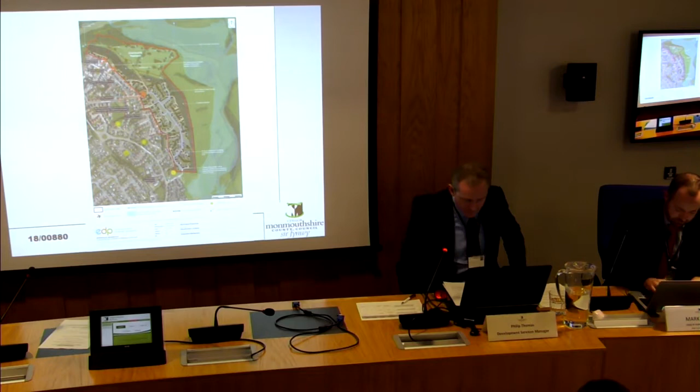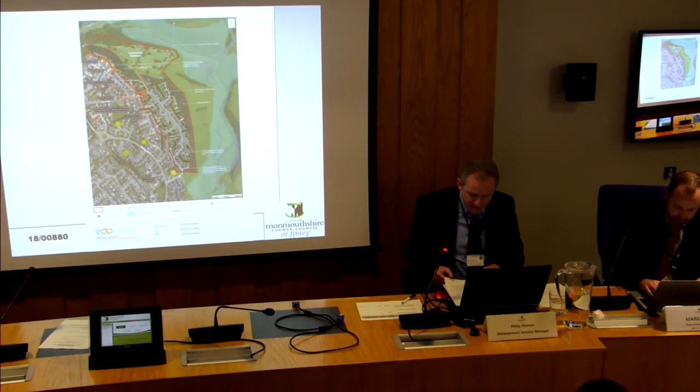4. Unallocated sites are required to deliver 35% affordable housing, and no negotiation will be entertained, although there would be 60% where the development relates to a main village.

5. The development must be acceptable in other planning terms. If infrastructure is inadequate to support new development and it cannot be satisfactorily improved via a planning agreement, permission would normally be refused. This includes matters such as highway capacity, school capacity, primary health care, air quality and the sustainable transport hierarchy as set out in PPW 10.

This applies to all planning applications for residential development, not just unallocated sites. 6. The scale of additional residential development will be considered in the context of the LDP's spatial strategy, both in its own right

and cumulatively with other approved residential development. 7. Development should be restricted to the main towns, Severnside and rural secondary settlements, with the exception of Llanfoist and Raglan, where there should be no additional development on unallocated sites outside of the new LDP, although that is caveated as set out in the report in Raglan's case.

And small, 60% affordable housing sites in those main villages without an allocated site, namely in this case, St Arvans and Llandogo. 8. The size and mix of the proposed dwellings is both suitable for the location and seeks to address our demographic challenges. 9. Any planning permissions will have a reduced lifespan, as set out in the report.

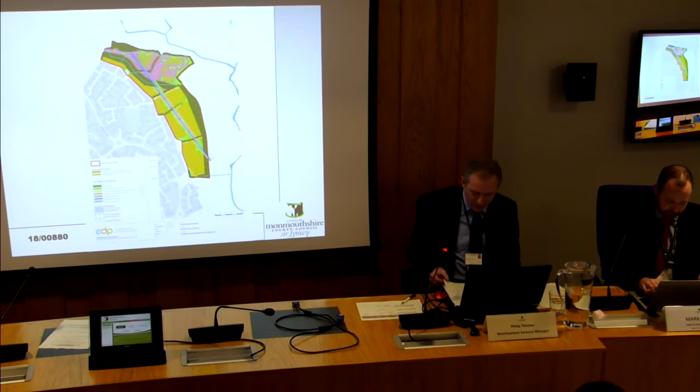This will ensure future occupiers of the site have the opportunity to access local facilities and employment via foot, cycling or public transport, with less reliance on the private car. So we'd recommend approval of the application subject to the Section 106 agreement, which includes affordable housing funding, the education contribution, green infrastructure contributions and green transport funding, as well as the planning conditions set out in the report. Thank you.

Thank you, Phil, for that very detailed presentation. Would the local member now wish to address the Planning Committee? Councillor Watkins, please. Joe, you have 6 minutes.

I'm here to represent the views of my residents who have written to me relating to the proposed development off Church Road in Caldicot. For completeness, I need to say a very small number of residents contacted me in support of the proposal—one in terms of the affordable housing element as they were on the waiting list themselves, and the other stating they hoped increasing the size of Caldicot might help regenerate the town centre. However, the vast majority of residents have opposed the scheme for a myriad of reasons.

I will now list the reasons directly presented to me, but then highlight the ones that I believe as a planning committee you should consider most strongly. There were many concerns about the infrastructure in Caldicot.

The doctor's surgery has long waiting times and it's almost impossible to get an NHS dentist, which leads to higher prices for private dentists. The schools are at capacity. I know Aneurin Bevan Health Board has stated that there are issues with recruitment rather than building space, but that is no consolation to any of my elderly residents who struggle to get an appointment.

Schools are covered by the Section 106 arrangement, but I challenge this council—Caldicot schools are already full. We cannot wait for the houses to be occupied and get the 106 funds before we build the extra school places we require, or we will have a ridiculous situation in which we are busing our children from one town to the next, and it will create an ongoing problem.

Concerns have been raised with me about the archaeological remains found in the Nedden Rise and whether more will actually be discovered on this site. There is also big concern about the increased traffic flow that could impact on air quality, which is a problem throughout our county in some of the more built-up areas, and that might cause damage to the Roman ruins in Caerwent.

Yes, good afternoon, and thank you, Mr. Chairman, for allowing me to speak on behalf of the overwhelming number of Caldicot residents opposed to this application. We are here once more because there was a major error in the supported evidence concerning the availability of affordable housing.

This was an MCC error that was not picked up by either MCC or the speculative developer who knows full well the system and how the numbers for affordable housing are calculated. This error was identified by a member of the public. The evidence that was relied upon to justify your original decision to approve in November has changed significantly.

The last time you voted, you made your decision based on incorrect data that showed a shortfall in housing availability, particularly affordable housing. The shortfall is now significantly less. According to your own targets, it is in fact 38.

We require an answer why these incorrect numbers and developments were able to go unnoticed and have been used to justify a departure from the LDP. How could MCC lose track of the numbers? Why should we now rely on any evidence put forward?

The Church Road development is outside of the LDP, a development brought forward by a speculative developer whose sole motivation is profit. The residents of both Church Road and indeed Raglan, both areas outside of the LDP, have had to act as oversight and throughout this process have identified the errors in data and statements.

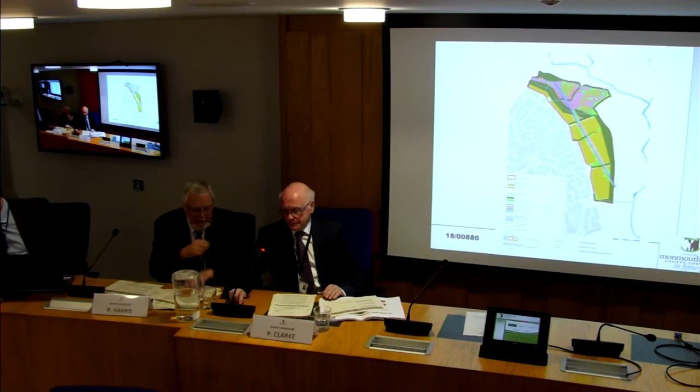Thank you, sir. Roger Heffer, the planning consultant responsible for this planning application.

Members, you've just heard points which I respect, but frankly, all points which have been made many times before over the roughly 10 months since this planning application was submitted. They've all been very thoroughly assessed by your officers, and your officers have concluded that, on balance, the planning application should be recommended for approval.

As you will be aware, this committee resolved to approve in November. In my view, the case now is even stronger than it was then. We now have the new PPW 10, which sets out some very strong guidance on how sites for development should be selected and how they should be planned and developed. This scheme is very much in accordance with that advice, as the officer's report spells out in some detail.

As far as housing numbers are concerned, we know there was an error in certain of the numbers. But the fact is that you still have a serious deficiency in terms of 5-year supply, I think it's still something like 3.5 to 3.6 years. More importantly, the economic and social needs of the county which are impacted by that deficiency are very much unchanged. You still face the prospect of a serious shortfall in delivery by the end of the current local plan period.

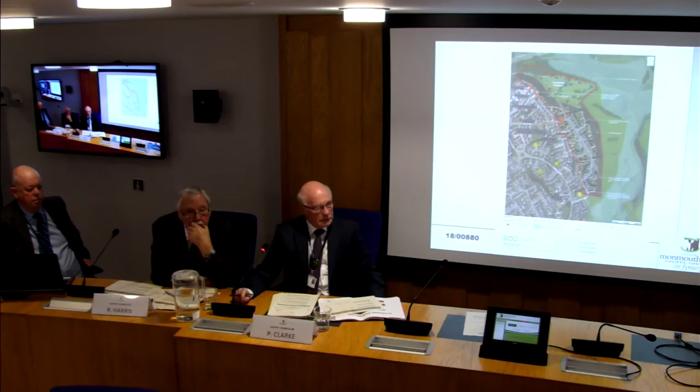Mark Hand now wishes to address us. Thanks, Chair. I've got some correspondence from the Town Council to make members aware of, because they're not here to address you. So two bits of correspondence.

The first one reiterates the points from Councillor Oliver Edwards, who attended the meeting in November. The short version is that the Town Council stance remains unchanged. Caldicot Town Council supports the need for affordable housing, however the Town Council refused the application when it came before them for the following reasons.

The proposed development is outside of the LDP. There's insufficient infrastructure, and a lack of primary school places in the Caldicot area. The doctor's surgery will struggle due to increased patient numbers, not just from this development but from developments in Crick, Sudbrook, Magor and Undy. Church Road is the main road that traverses Caldicot into the town centre, so additional traffic will cause a bottleneck, especially during school opening and closing times, causing a risk to children's safety.

I've also got correspondence from Councillor Rachel Garrick from the Town Council that I've agreed to read out, if you're in agreement, Chair. Councillor Garrick says she's one of the Town Councillors for Caldicot Castle Ward. As we're all aware, the application for the Church Road housing development is due at Planning Committee today. There appears to have been an oversight in that the Town Council did not receive any formal notification that the application's back on the agenda for planning. As a result, the Town Council has missed the opportunity to formally nominate a councillor to address the planning meeting on behalf of the council and residents.

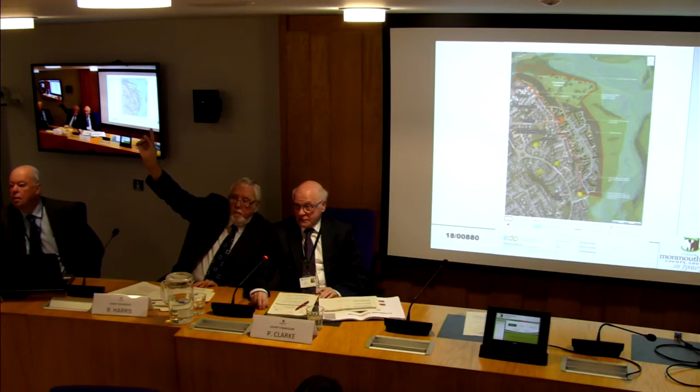Right, we've had the application moved for approval by Councillor Murphy. Is that seconded? Yeah, Councillor Powell. All those in favour of this application, please show. And those against, please show. One. Okay, the application has been approved.

Thank you, one abstention. Can I just make one point please, Mr Hand? The application is adjacent to what I consider one of the best developments we've got in Monmouthshire. It's very, very tidy, well designed, and I trust this present applicant will follow the quality that is already there. This is not a detailed application, just an outline, but I think he should know from our notes that we will look very carefully at the design when it comes forward.

Okay, noted. Thanks Chair. Just for completeness, to confirm what Phil mentioned at the beginning, and to be certain in terms of the process, we'll make Welsh Government aware of this, and they'll have the opportunity to call it in again, because this is a fresh decision today. So we'll go through that process and tell you the outcome. Thanks Chair. Thank you very much. Better go and get Hannah. Yeah.

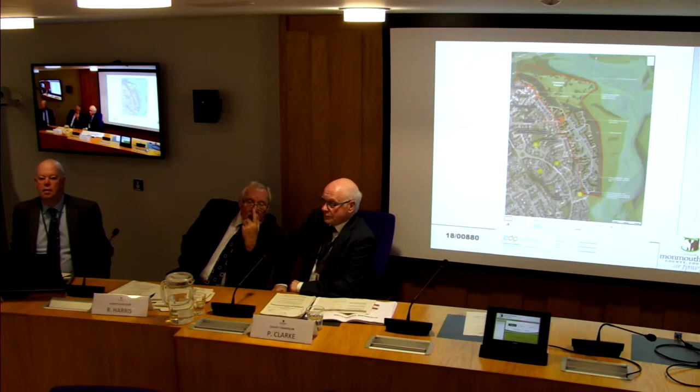Right, we carry on now to the next application, which is on page 57. It's number 00894, at Hatcham Barn, Court William Jones, Monmouth.

Could I take this opportunity to say that the photograph that you were shown... Sorry, sir, you cannot speak at the moment. Your opportunity will come in due course. Please carry on, Mr. O'Connor.

Thank you, Chair. So this is the proposed site plan, which shows the proposed parking to the east of the site, and also the extension, which is accessed via the glass link, which we'll come onto now.

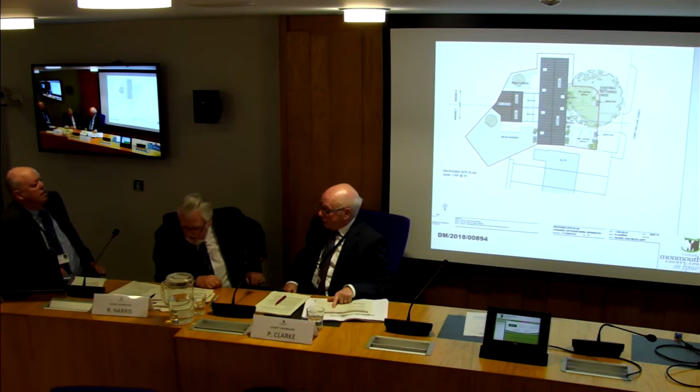This is an internal ground floor plan showing how the building would be subdivided, and it also shows the link for the extension, which is the glass link for the dining room and kitchen area.

This is the elevation detail for the proposal. As you can see, the stone building would be extended vertically with a timber extension, featuring timber louvres and a stone wall to the base of the building, with a metal corrugated roof with roof lights.

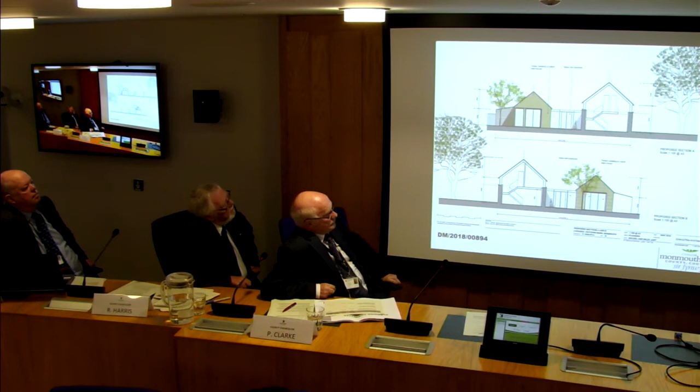This shows the extension proposed to the west of the building. As you can see, there's a glass link and a single-storey timber extension which would accommodate the kitchen area.

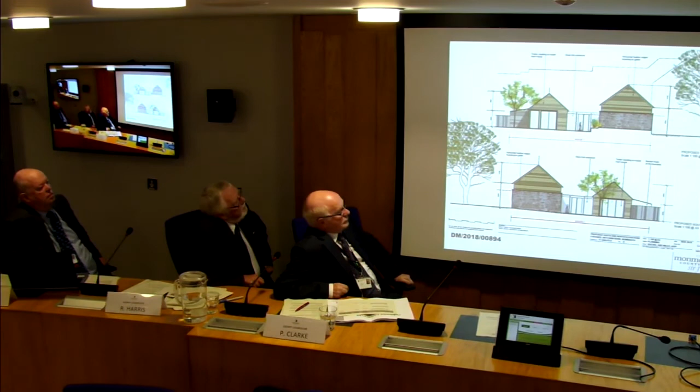This shows the north and south elevations, noting there would be no windows on those elevations at each end. The roof of the building would be extended up to 7.2 metres to the ridge and 4 metres to the eaves.

So in terms of the extension, it measures about 10 metres by 7.9 metres, and it measures about 5.45 metres to the ridge.

The proposed development has been designed with the heritage officer in mind. They've been involved with the planning application, and there's a subsequent concurrent listed building consent application as well. They've been working with the applicants to ensure we get a contemporary modern design on a historic heritage asset, done sympathetically in line with what the heritage officer requires.

In terms of the parking for the site, as I said, if you go back to the site plan, please Philip, there are 2 parking spaces per dwelling. They're 3-bedroom dwellings which are proposed. Monmouthshire's parking guidelines say we should be aiming for 1 parking space per bedroom, so this is slightly not meeting that requirement. However, this is a sustainable location within a central location of Monmouth, and therefore, on balance, planning officers are of the mind that the 2 parking spaces per dwelling in this instance, in this context, is acceptable.

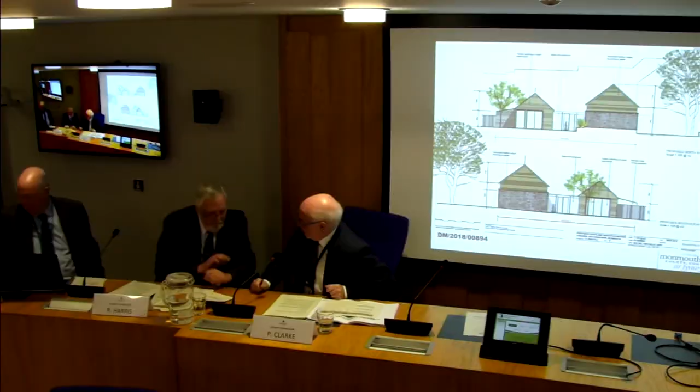Thank you, Mr. Chairman and members of the committee. I'm here to speak as a resident in opposition to this particular application.

You will have read the report, members, and it's been reiterated just now by the officer that pretty well the whole of the report is predicated on comparing the application as it stood prior to some tweaking by the applicant. That comparison doesn't take into account the existing site, nor the existing planning permission. The permission mentioned was part of the overall redevelopment of the Haberdashers' boarding houses, one of which I happen to now occupy, which is St James's House.

The existing planning permission is for a 4-bed barn conversion, but like in every instance, it did have an additional entirely new building at the rear, which was dropped prior to consideration by this committee. What's happened now with the present application is that by raising the roof and increasing the usable floor area on the first floor, and by inserting an additional extension at the rear, you have pretty well returned to the very permission which you didn't consider but would have refused.

On a point of further clarity, if you've got 2 houses or 2 barn conversions being built side by side, what we're saying is you can live in the one that we're going to propose you're going to pay affordable housing on. Therefore, you can remove your obligation for affordable housing, and the one you're not going to pay affordable housing on, you can get away with. There's a technicality there which we're being blindsided by a little bit, I think.

Mr. Connor, I appreciate what you're saying. I think if it was another site which didn't have any previous planning history, the point is that this has got a previous planning consent, so it's exempt from affordable housing because that policy wasn't in place at that time. A 4-bedroom house could be built there now.

Okay, very quickly, thank you very much Joe, I really appreciate that. What I would say is that what was previously approved, people have been accepting of. We're putting more blight into that area. If we're putting more blight into that area, we as a council, we as the community should be looking to get more out of that area.

That's my thinking. What was previously approved is so far removed from what is being proposed today that I can't see, and I don't believe that whilst an element of it has extant planning permission, this scheme doesn't have extant planning permission. A quarter of the ground space might have extant planning permission, or a third, or whatever that element is, but it's so considerably different to what's being presented to us today that I feel very uncomfortable with saying that we're looking at simply eroding the affordable housing contribution from that one unit.

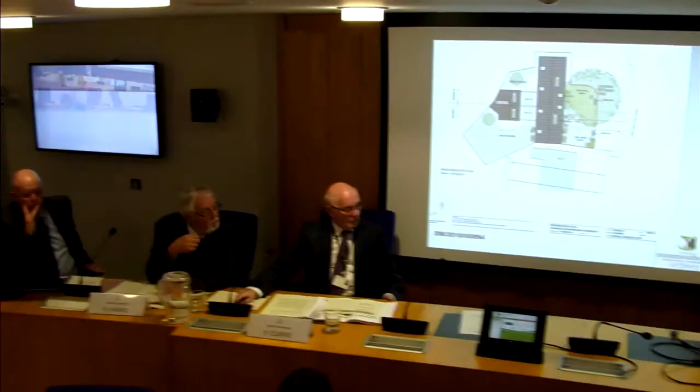Thanks Chair. To my mind, all of the issues are straightforward, apart from the affordable housing question that Councillor Feakins has raised. I think Craig's covered off the points - we're satisfied in terms of impact on neighbour, in terms of amenity, but you've heard what Mr. Rogers got to say and his concerns, and you'll have seen on one of the slides how this property relates to the others. Then parking - straightforward in terms of sustainable location. Planning Policy Wales Edition 10 is very clear on us not having strict parking policies in that kind of circumstance, and there is amenity space for cycles and the like, so that works.

Design-wise, comments have been made about it being subjective, but it's a conversion, oddly in an urban setting in a town. If it weren't for the listing scenario, you could knock it down and build new. It's only because it's a listed curtilage building that it's being converted this way. But we as officers were very happy with the design.

So it's the affordable housing question - that's the dilemma we're trying to think through. There's the one extant consent for a 4-bed conversion. Our policy is clear, and it comes from the CIL regulations, which are clear about self-builds being exempt from that policy. That's where we've taken that from.

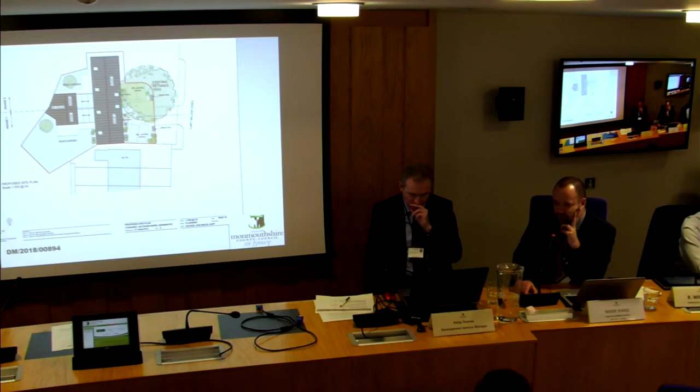I think your concern, Councillor Feakins, is almost doubling up on the freebie on the exemption. So the reality would be - I'm just trying to think this through out loud - we'd be highly unlikely to get 2 contributions anyway, because one would be a self-build. There's 2 units there, so one would be a self-build, so we would only get 1 contribution. I think it's worth us having to think through how that can work.

Would a unilateral undertaking be useful in that situation? In effect, there's a gap in our policy at the moment where they could convert the one and then still claim the self-build allowance on the second, by living in the second but converting the one to free market. To me, that stinks a little bit.

Not stink, but it's just something that's happened by 2 policies marrying together. But if we were to ask for a unilateral undertaking, maybe we would secure that position in advance, if that was possible. Or defer it and leave it to you.

Yeah, Chair, sorry, we're just discussing if there's a way in which we could merge the extant consent and self-build provision, so there is still that 1 contribution. I'm not sure how we'd arrange that in terms of a legal agreement, but I expect there is a way.

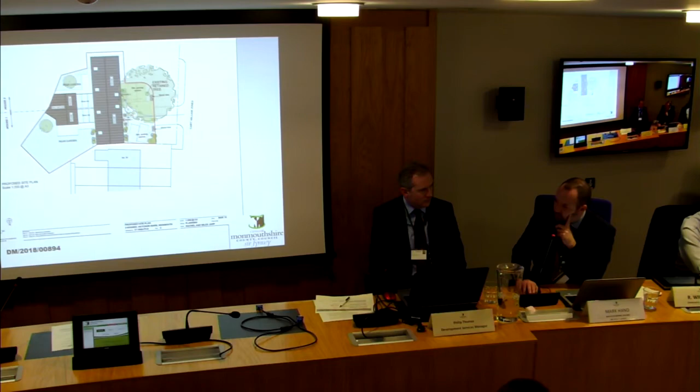So it's been moved and seconded by Matt, and seconded by Councillor Webb. Sorry, Phil. Just a point, Chair. In view of the fact that everybody seems to be happy but everything else - I put happy in inverted commas because...

If that is the only outstanding point, it could be referred to the delegated panel to decide after. It's only a thought. I thought it's quite a strong point coming here, and I think maybe the 3 of us, it leaves us a bit susceptible to criticism.

I think I prefer on this instance, Phil, to see it come back here, because I'm interested in the outcome. So it's been moved and seconded that we defer it for a month, well, until this matter of the contribution is resolved. Is that what you want to do? All those in favour, please show. Right, okay, there we are. Nobody against? No.

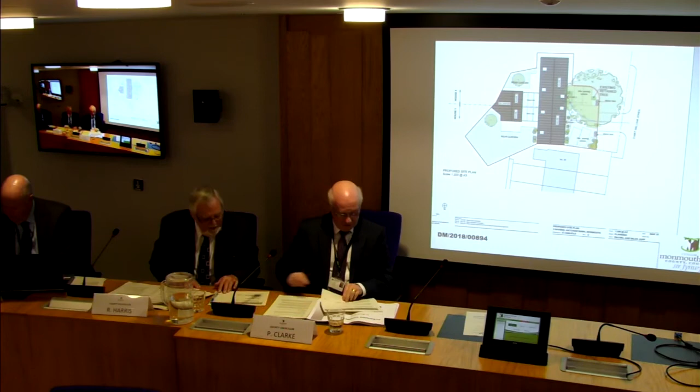Right, it's taken us an hour and 40 minutes to do 3 applications, so I think we ought to speed up. The next one on the list is - so we go on to page 89 now. Oh, I see.

No, you're quite right. Page 73, application 1339 of Penny Park, Lantilio. Yep, thank you, Chair. So this is a full application that relates to a parcel of land on the edge of Llantilio Crossenny that is accessed directly off the B4233. It's worth noting that the application is presented to Planning Committee today as the agent is a close family relative of a member of the development management team. Before going into the details of the application, I think it's worth familiarising members with the background and history to the site.

Planning permission DC2014-00161 was granted in 2014 for the conversion of a redundant building to provide holiday let accommodation. The application at the time was supported by a structural survey undertaken in November 2013 that concluded the property was suitable for conversion. Works then commenced in December 2016. However, the building had deteriorated since the original survey, and further to inclement weather in January 2017, the applicant sought advice from a health and safety specialist.

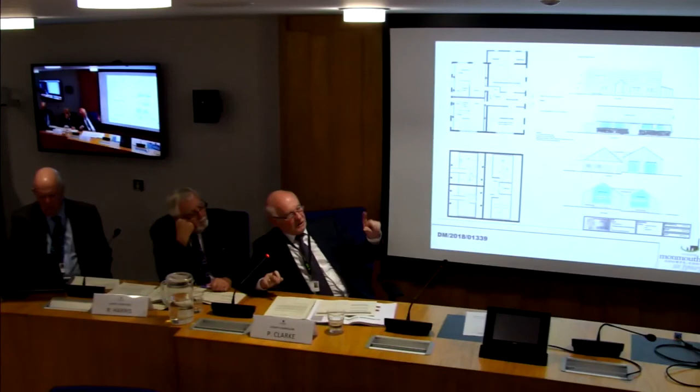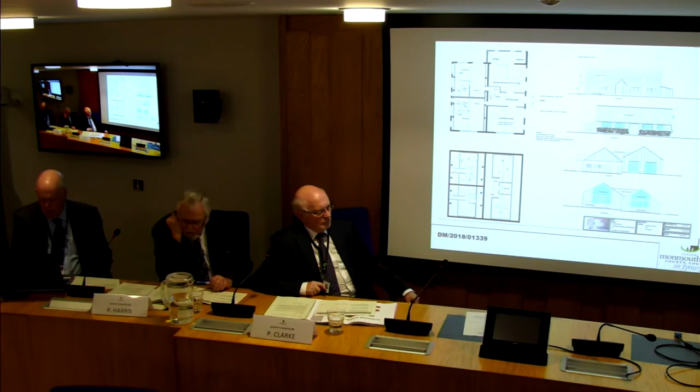The building wasn't demolished. Its demise was an act of God. The applicant took every measure he could to try and save that building. The applicant's intention has always been and remains to implement the consent that was granted. In terms of the flood issues, I think I've covered those sufficiently. So members, you're urged to approve this on the basis of considering the application against those material considerations, which I believe you can apply to this current planning application. Thank you, Chair, thank you very much.

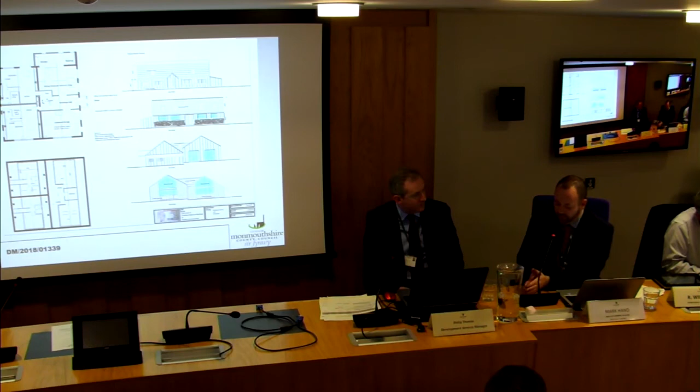Yeah, I think this case is more straightforward than a normal clarification about when it's building a building, because this isn't conversion. There is nothing to convert. It's just a slab of concrete. So there's nothing to paint or nail together.

Okay. Councillor Murphy? Yes, Chair, I wanted to pick up on the foundations as well. I mean, Councillor Higginson was trying to rescue the situation, I think, by saying that if we could raise it up, we could possibly get it out of the flood zone. The applicant's clearly looking to build on the existing footings, which are quite substantial.

There would be quite a lot of expense to add to his woes, and I have great sympathy with the financial situation, but I don't see how that relates to a planning decision at all, I'm afraid. But there would be considerable expense to raise it above that C2 limit, and I've got grave doubts as to whether an inspectorate would approve it even then.

So to pick up on Mark Hand's comment, with a heavy heart, because I've got a great deal of sympathy for him, I shall be supporting the refusal.

Thank you, Chair. I think in common with most of the members here, I'm very sympathetic to the situation that the applicant finds themselves in. But at the end of the day, as a planning committee, we must abide by planning law and take the advice, I think, of the officers concerned. What we don't want is this application being approved by us and then going somewhere and being told that we've made the wrong decision when it's clear that the policy says this is now a new development. And whilst I sympathise very much with the applicant, as far as I'm concerned, I support what the officers are saying, and that we should not approve this application. Thank you.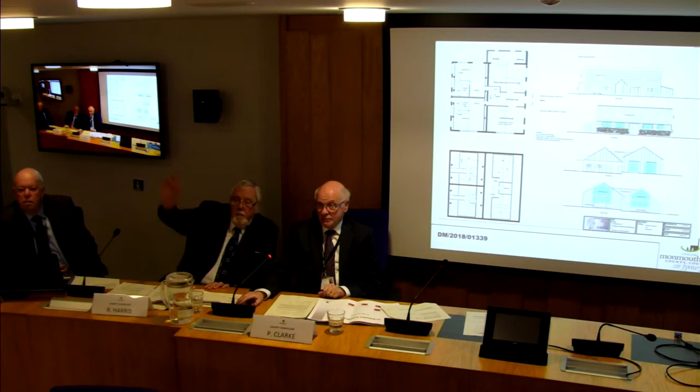Thank you, Rod. Right. Would somebody like to? Councillor Higginson. Yeah, I propose that we accept it, and there are circumstances in which the site could be used for housing development or development of residential property, and I'm maintaining my proposal. Okay, and is that seconded? Yes. Right, those people who would like to approve it, please show. 3, 4. And those against, please show. 5. Therefore, and I'm abstaining, so therefore I'm afraid it is lost. Whoops, with a very heavy heart.

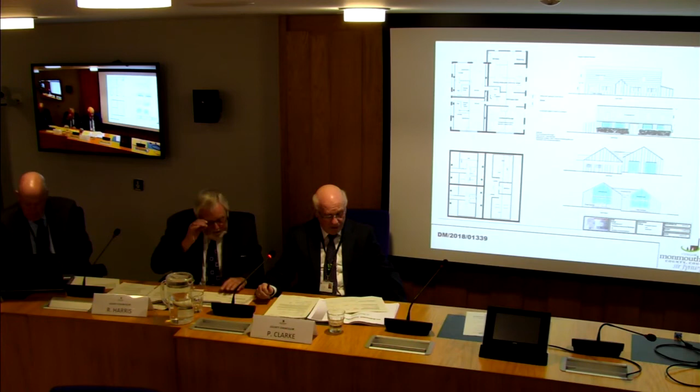Right, the next application has been withdrawn, so we go on to page 109 now, and that's for the barn conversion into holiday accommodation at Penterry, St Arvans. Okay. Mr O'Connor. Thank you, Chair. Yes, this application is at Penterry Farm, Chapel Hill Road in St Arvans, and it's for the conversion of a barn to holiday accommodation.

So on the screen here, members would have seen yesterday, this is the barn in question. It's a modern agricultural building, breeze block, steel framed, some timber cladding. If you go back to the previous photo, please, Phil. That road on the side there is actually a public right-of-way, so members need to take note of that, as you did yesterday on site. I'd like to go through the photos. Keep going, please, Phil. It's a standard agricultural building which you'd find across Monmouthshire.

This is the siting of the agricultural buildings, which is adjacent to 2 residential properties, the barn to the north and a bungalow to the south. In this location, it is those group of buildings to the north.

Yeah. This is again a block plan of the site.

This is the proposed site plan, so this shows the access points on either side of the proposed holiday accommodation and the parking provision for 2 spaces per unit.

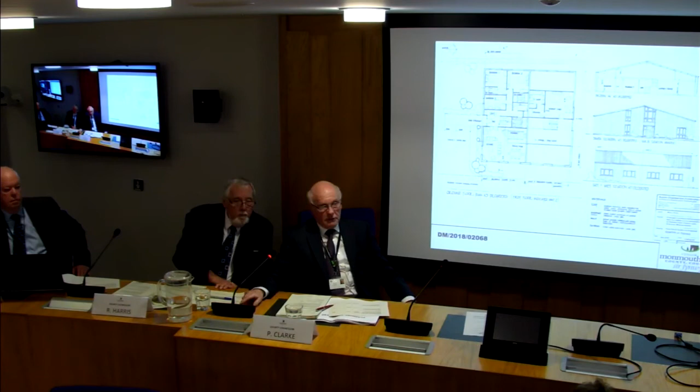Thank you, Chair, for the opportunity to address the committee today. I'm David Glasson, representing Mr. and Mrs. Parry. Penterry Farm is no different to any other farm. It's been compelled to explore farm diversification simply in order to survive in the current economic climate. With increasing energy costs, lower food prices, and all the uncertainty of the UK's departure from the European Union, the additional revenue from holiday letting will support not only the core farm business, but it will have positive spin-offs for the surrounding rural economy as well.

The farm is well placed, sitting as it does above Tintern Abbey, and likewise the Wye Valley and Forest of Dean. Tourism, as we know, is actively encouraged in Monmouthshire, and additional accommodation will unquestionably strengthen the area's appeal as a visitor destination. The barn in question is sandwiched between two dwellings and has not been used for agriculture for 10 years, due to the impact farming activities would have upon the amenities of these dwellings.

It is described as of modern construction, but it actually dates back to the 1970s. It might not be attractive to look at, but it's in sound structural condition, so it's not going to disappear any day soon. Like any other barn conversion, the roof needs replacing, the walls need recladding, but this does not, I stress, does not amount to rebuilding or even new build, and it's really no different were the barn being upgraded to, say, a grain store.

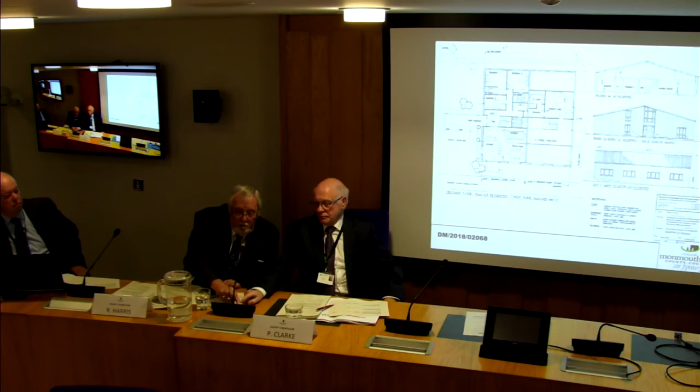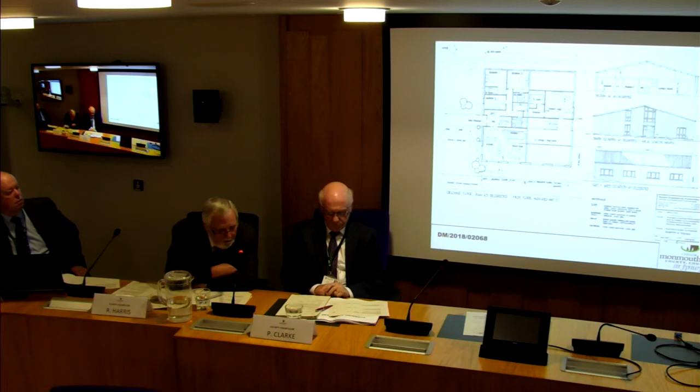Thank you, Chair. Just to point out that we've got hundreds of this sort of barn all over the county, and we would need to be very careful if we say yes to this one against officer advice for a start. And as I say, there are hundreds of them, and how would we resist hundreds of applications coming in? Thank you, Chair.

Right, yes, David, Alan, sorry. Move refusal of the application, Mr. Chairman. Okay, that's seconded, thank you Councillor Murphy. Those in favour of refusing the application, please show. Okay, everybody. I'm abstaining as usual. So the application is refused.

We now go to page 79, which is a full application for four affordable dwellings at Llantilio Crossenny. Andrew: Yes, thank you, Chair. This is a full application, as you say, for the erection of 4 affordable dwellings in the village of Llantilio Crossenny. The site is to be considered as an affordable housing...

Okay, thank you, Chair. So yes, this site is to be considered as an affordable housing rule exception under policy H7 of the LDP. The application is presented to members today due to concerns raised by the Council's highway engineer. A number of the members in the room were on site yesterday. If we quickly look through the site photographs: this is a view to the east looking at the vicarage. That's a view to the south, also the vicarage.

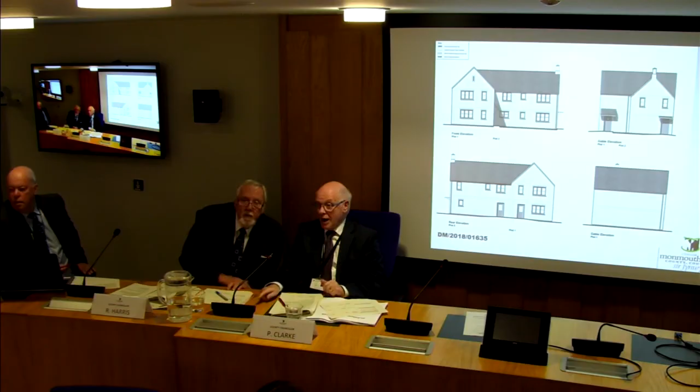Thank you, Chairman. When we were on site, I mentioned the idea of having a smooth render as opposed to the rough render, and I don't think there was any objection voiced by the applicant to that idea. It does seem a good scheme to me with affordable housing. The only question I've got is about the visibility splays, because there was a question about it only being on one particular side rather than the other in the highways report, and I wondered how that would be looked at.

Thanks. Andrew, do you want to answer that? Jeff, if I can just come back to that point on the visibility splays. Just to confirm Councillor Dovey's other point with regards to the render, as confirmed in the presentation, it would be smooth render, as discussed on site yesterday.

Okay, Councillor Higginson? Oh, Councillor Dovey dealt with mine - he beat me to the punch. Oh, okay.

Councillor Feekins? Thank you, Chair. A really good scheme, a delight to see before us, and I would second David's approval.

It absolutely fits with the criteria of the overwhelming need to provide affordable housing in the countryside. So if you want to put it to a vote, Chair, I think we would all know what we were going to do. All those in favour, please show. Thank you.

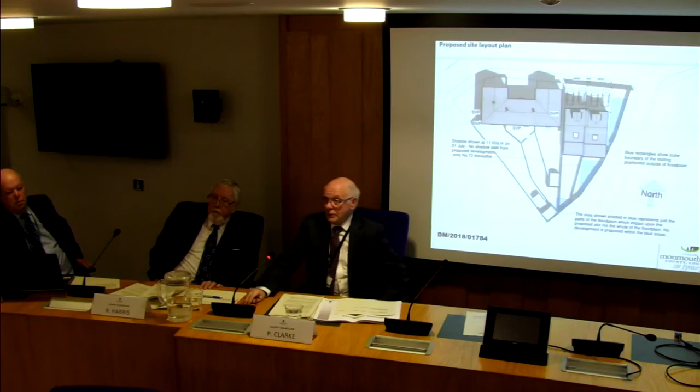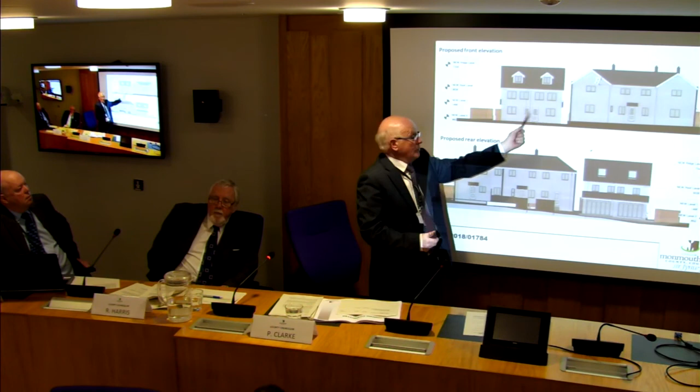Thank you. Could we just go back to the elevations, please? As an observation, you've got 3 floors going in here to a space that's got 2 floors. It doesn't look anything like anything else around it, and it'd be so much easier to develop this piece of ground with one more property which matches up and looks like what's there already. Why stick a carbuncle on a small spot that it won't take? That's my view.

Yeah, I totally agree with the comments that you made. I mean, if there was one house there, it wouldn't be a problem. But the way that it is, right up to the boundary, I don't think it's acceptable. And you mentioned it's totally out of context with what's already there. Anybody else wish to add to it?

Then I'll move from the chair that we refuse this application on grounds of overdevelopment. Is it seconded? Councillor Peters: Yeah, thank you very much, I second that. All those in favour of refusal?

Well, normally you would defer the application, yes, but officers could prepare reasons for refusal. Yeah, they'll bring it back. They'll bring it back next month. Okay, all those for refusal, please show. That's everybody. Well done.

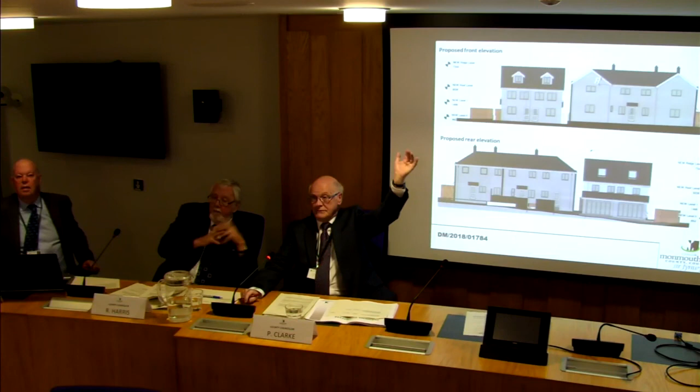Chair, just to make sure we're clear before we bring it back next time: you were talking about overdevelopment and the design in the street scene, yeah? There were comments made from Councillor Fox about highways. There's no objection from highways. That wasn't mentioned during the debate, to my knowledge. Are you content on that aspect? I think if we only had one.

On that, having visited the site, it is a no-through road. Therefore, almost by definition, everyone using that road will know what the problems are. They'll see how bendy it is, and how many children are using it, and theoretically, I suppose, should be taking that into account. I don't think we have a problem highways-wise. I agree with what highways say.

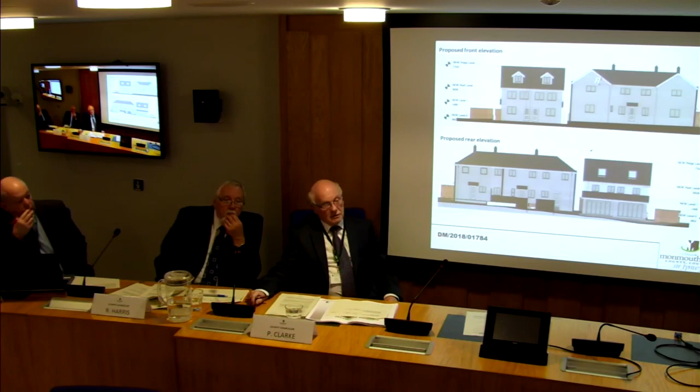Sorry, Jay, I just wanted to give members a bit of history to the site. It came in as two 4-bedroom houses to start off with, and the applicant has been advised that one dwelling might potentially be more acceptable. So there is a bit of history to it, but they do want this application determined on its merits.

So the reasons that you've outlined, obviously we can come back and defer that to next month if you consider it.

Thank you, Chair. If I could just come back on the highways aspect. I can see why highways officers think it's all right, because it's on that junction and there's a wide bit of road to the east of it. But the way the on-street parking is in that area, and the fact that it's a very well-trafficked area because of the substantial activity behind this development with the village hall, the cornfields project, the play area and everything else, I can see why there would be a danger in traffic movements. The existing traffic flow there wouldn't be, and you'd have vehicles reversing in and out of that site at an area where there's congestion anyway. So I think there is a problem with highways.

Just quickly, Chairman, it's also a double bend right by there. Okay, are you all still mindful to refuse it on that basis? Nobody for it? No.

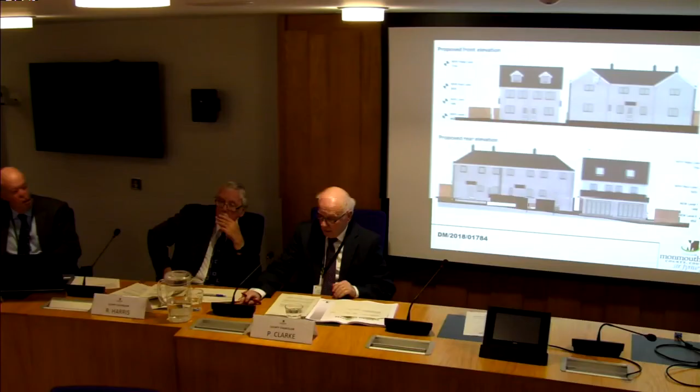Sorry, Chair, I'm unclear. Is highways a reason for refusal or not? Shall I suggest we present it back to you at the next meeting with the reasons around overdevelopment and design, and if you're minded to add another one then, and you're happy you can substantiate that at appeal, then so be it. Okay, thanks.

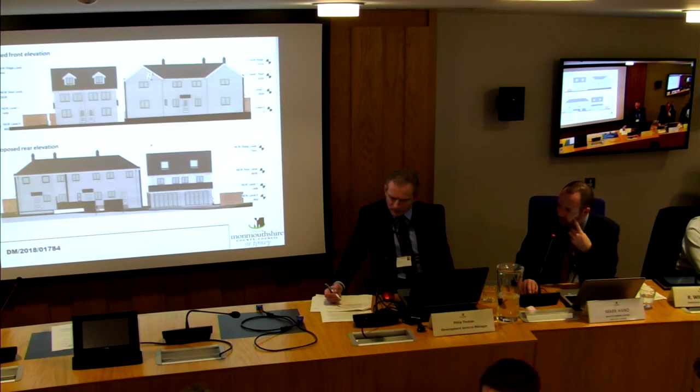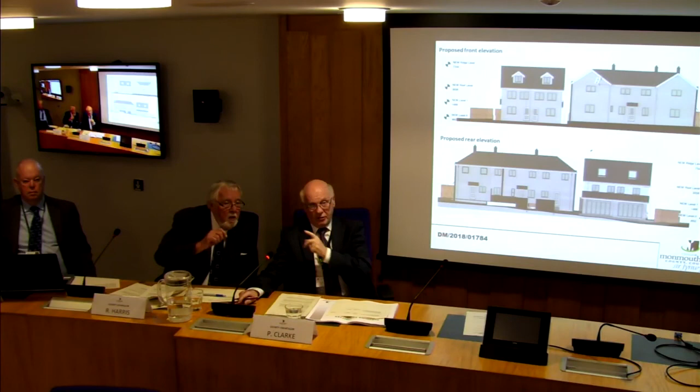Chair, can I ask that highways officers give a bit of thought to the actual use of that bit of road in that context? When we went there with the delegated panel originally, it was actually quite a dangerous place to stand. We had to stand on the pavement. There were cars coming quite quickly round both directions. So it has got its highway problems, that stretch of road.

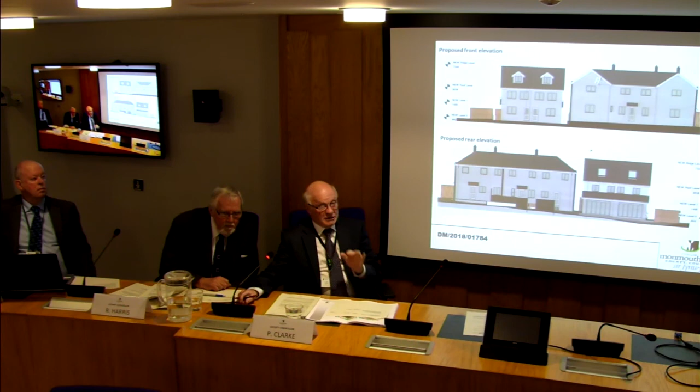Okay, thanks, Jim. One final thought, Chair. I think a number of us on the committee have indicated that we would like to see the officers talking to the applicant about one dwelling. Not that we don't want to see anything there at all, that's just my take on it, and that's what I'd like to see there - sensible plans coming back for one dwelling.

We have one application left this afternoon on page 117. It's application number 00142. It's only here because it's one of our own. Would somebody like to move it? Is anybody against it? No, then it's moved. Thank you very much, everybody.

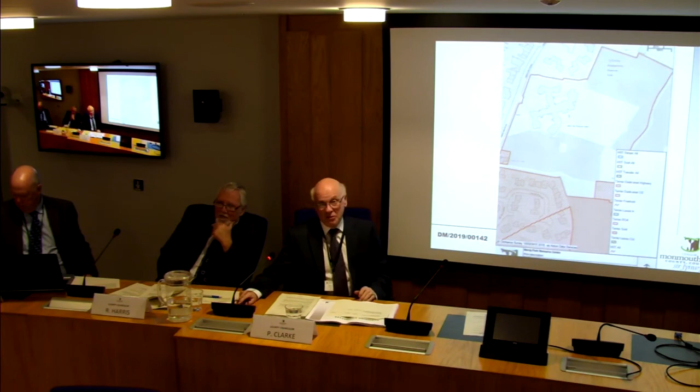Mark, do you wish to say anything before the end of the meeting? Chair, two things. There's an appeal decision on the agenda that members will have seen relating to Caestory Avenue in Raglan, which is an appeal that was lost, but the decisions are there in the agenda. We also want to cover the infill SPG, seeking Planning Committee's comments before it goes out to consultation. And last but not least, I've emailed you about an additional meeting on the 19th of March, 10 a.m., where we'll reconsider the Raglan application and probably a couple of other things on the agenda.

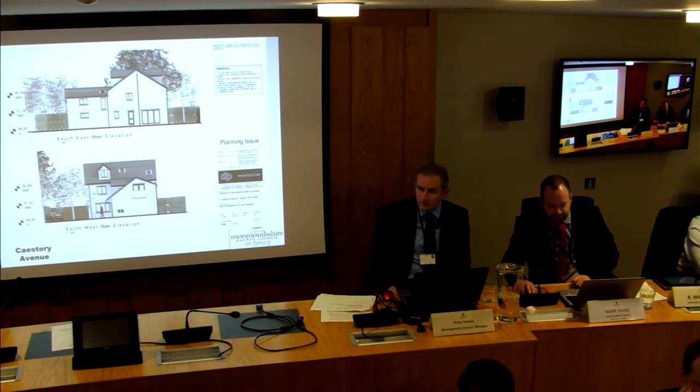I just wondered when we were going to discuss the appeals. Well, I wanted to make a comment on one of them. You carry on. Well, it was in relation to the one in Raglan.

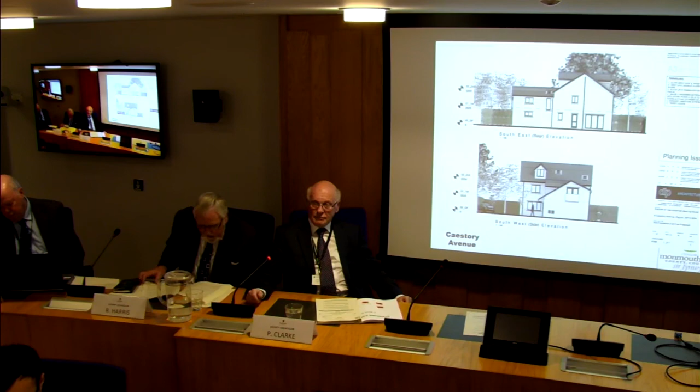If you have a look at paragraph 7 of the decision and also paragraph 7 of the cost decision - paragraph 7 of the decision says the houses closest to the site on Caestory Avenue are two-storey semi-detached dwellings with render-painted walls which, save for some minor alterations, have retained their original uniformity of appearance. And in relation to the cost decision, again at paragraph 7, it talks about it basically being a subjective decision based on character and appearance. Taking those two things into account, I can't see how, in view of it being a subjective judgment by the committee, I can't see how it's an unreasonable judgment, which is the basis of how costs are awarded.

I wondered whether the committee wanted to consider expressing concerns to the inspectorate, quoting from those two paragraph 7s. First, in relation to the decision, paragraph 7 says the reasons we put forward were because of the uniformity of appearance, and then there was the 'however' afterwards in that paragraph. But if you took off the however, the reasons the committee made the decision were actually within the inspector's report. On the cost paragraph 7, he admits it's a subjective judgment and then allows costs on the basis that the council committee were being unreasonable. I don't think those two things add up properly. So from that point of view, okay, thank you.

Microphone on. Microphone, David. I thought the meeting result... I go with Councillor Brown. I think we should get what we can out of this. I think the whole thing... Well, we had a conversation about it yesterday on the bus, and I just feel that the outcome is a travesty, and even the legalities of it I question. I think it's wrong.

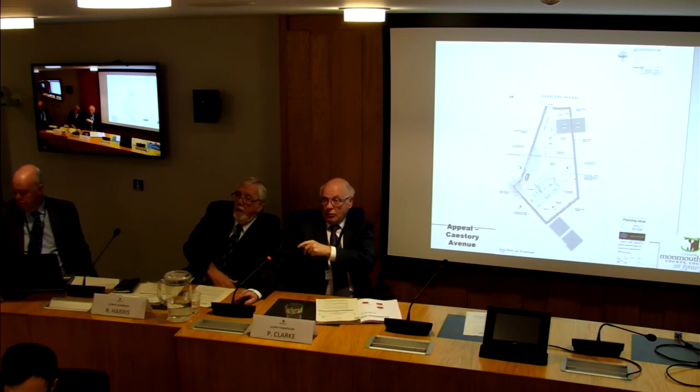Is it your general wish? Can you all show whether you would like Mark to write to the inspectorate about the outcome on this particular application, both the decision and the cost award? So you, obviously you, 4 of you. 1, 2, 3, 4. You, Roger? 5. Yeah. Anybody? 6 with Jim. Will you write, please? Okay, thank you very much. Yeah, we'll do, Chair.

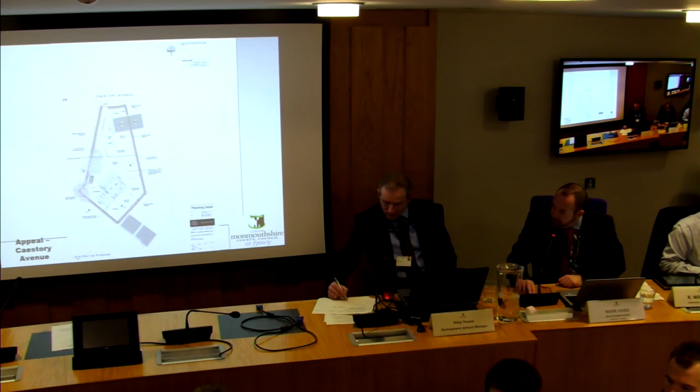I'm David Wong, a senior planning policy officer. Some time ago, planning committee suggested it would be useful to have additional guidance in place to help shape proposals for small-scale residential infill development in the county's designated settlements. As a result, we have produced this draft supplementary planning guidance for infill development, which provides detailed matters that need to be taken into account when considering proposals for small-scale infill development. Small-scale means any proposals with less than 10 dwellings. The county's designated settlements means all settlements defined under policy S1, H1, H2, and H3 of the LDP, for example the main towns, Severnside settlements, rural secondary settlements, main villages, and minor villages.

Appendix A of the draft SPG sets out all of the relevant settlements if you need more information. You will note that this draft document, excluding the appendix, is less than 20 pages. We wanted this to be an easy-read design guide, and of course it would be impossible for this SPG to cover every situation, as every road, settlement, town, or part of the countryside in the county has a different appearance or character. However, this SPG does set out the key matters the council would normally take into consideration when determining an infill development planning application. For example, site context like plot size, garden size, orientation, and general design of the area. We also need to take into account privacy and amenity, for example distances between habitable bedroom windows, parking standards, visibility splays, preserving good quality trees, ecology, drainage, and of course affordable housing financial contributions is another key matter that needs to be considered.